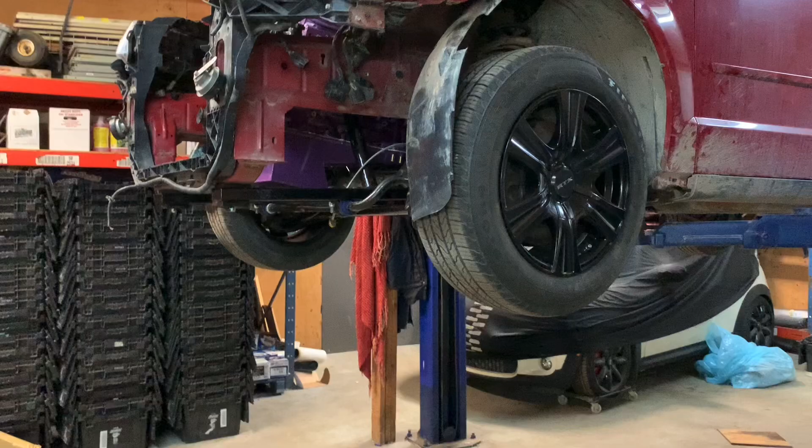I wasn't planning on working on the van tonight, but then a buddy of mine, Jonathan Wiseman, who's doing an insane K-swap turbo all-wheel drive Civic, which is insane, I'll say it twice. Anyway, he asked me about wastegates. He bought the exact same wastegate I did, which is like an eBay knockoff Tial wastegate. And he had some questions on how to plumb it, how to get it to work correctly, and I figured why not do a video on it for him. So here we go. So I'm going to set everything up on the bench with the turbo, the wastegate, some tubing and stuff, and we'll get started on this video.

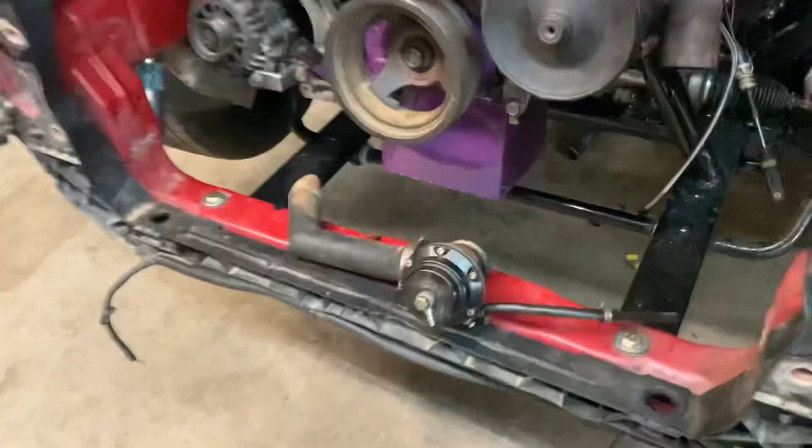I guess the first thing to talk about when you're trying to figure out how to plumb a wastegate is to know how the wastegate works. Here's our wastegate with the dump tube already on it because it was on the rat rod. This one's going to be situated kind of like this. So our exhaust comes up into the turbo, spins the turbo, all that fun stuff. But when we get up to our max boost, we want to evacuate some of the exhaust pressure so it doesn't overboost the turbo. That's where the wastegate comes in.

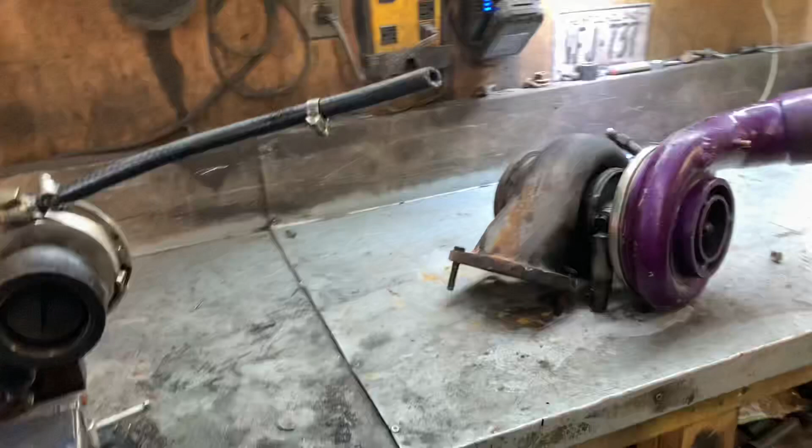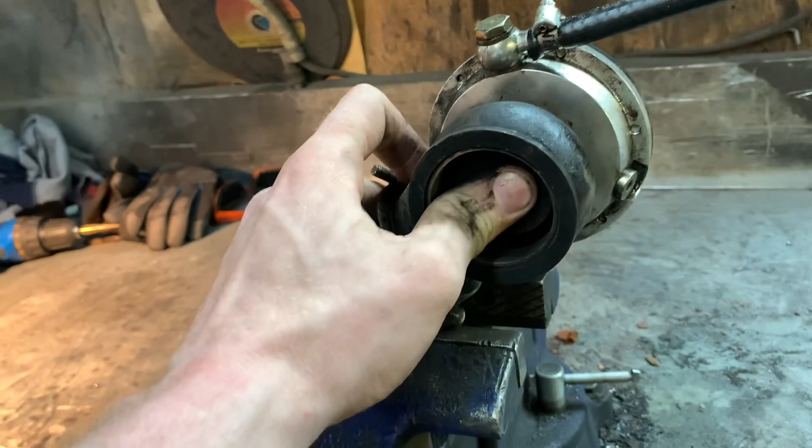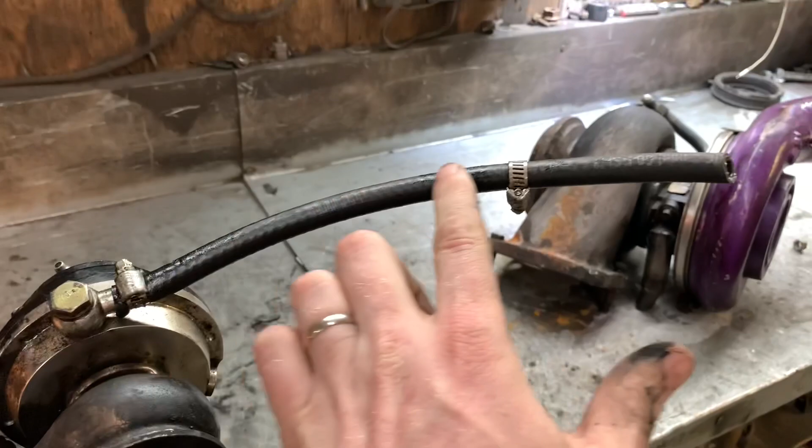When the turbo has enough exhaust going through it to make your peak boost, it needs to evacuate some of the exhaust. And it does so by moving this plunger that we can see here back. That way the exhaust can go out through the wastegate, out through the dump tube, and away. So how that works is there's a plunger right here that stops exhaust flow so you can build boost. When it's ready, it'll open. And it does that using a spring inside to keep the plunger closed, along with a diaphragm that gets pushed open by boost. And I'll take this one apart to show you.

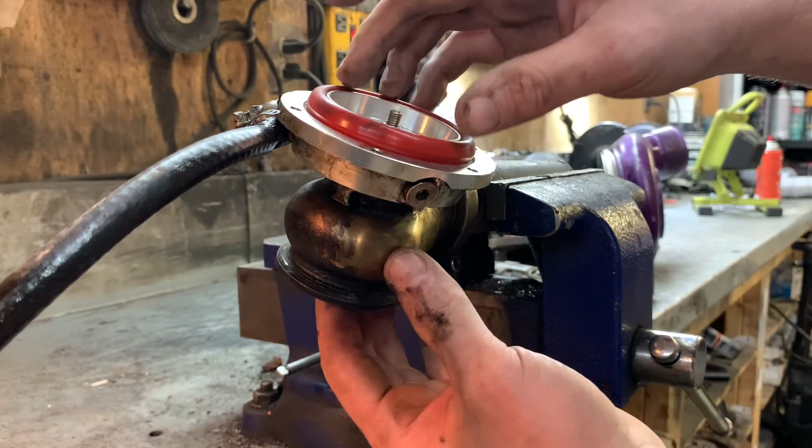And here's how it looks with it taken apart. So we can see our spring right here. Here's the cap with the top vacuum port on it. The diaphragm, this red piece around here, and the cup that the spring sits in that the plunger is connected to. With the spring out, it's easy to see that the plunger is allowed to travel up and down, or open and closed. Move it up here so it's easier to see.

You can see here that the plunger is fully open, exhaust is allowed to evacuate out through this pipe and calm down the boost. It'll maintain boost this way, because when you get your initial surge of boost, it'll open and it could potentially drop a little bit of boost, and then it'll sort of float in around where it needs to be to allow exhaust out.

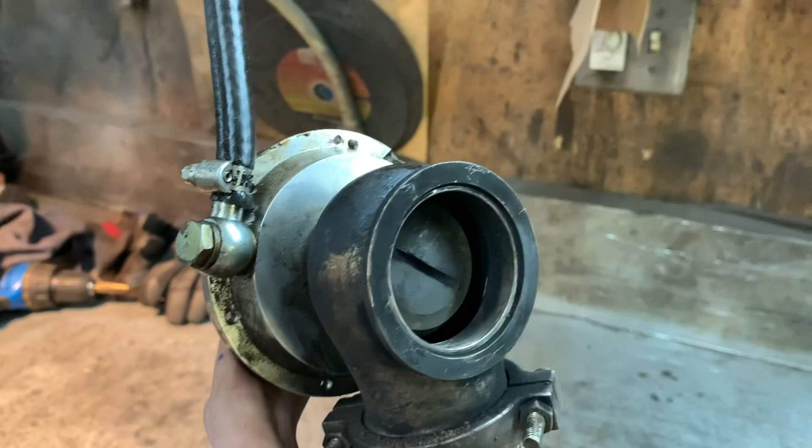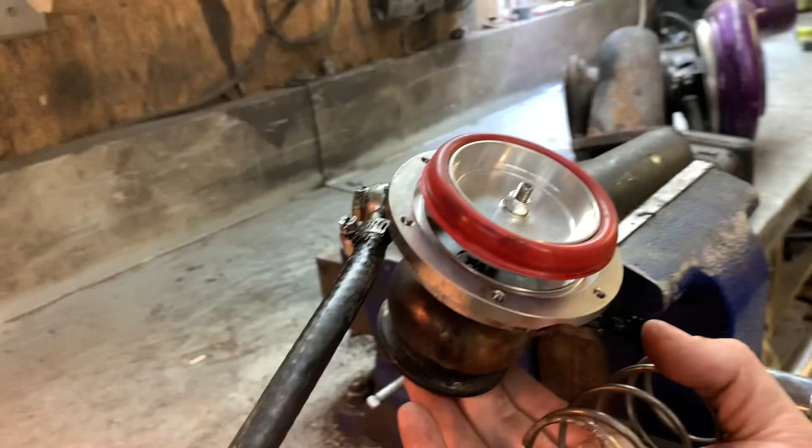But the spring sits directly on top of the plunger and stops the plunger from opening with no pressure. If you didn't have this spring in here at all, the exhaust would just push the gate open, you wouldn't make any boost. So the spring wants to keep it closed like this. They're quite tough to compress. This one is a 5 PSI spring. I ordered a 10, but eBay, so I got a 5.

As the spring is pushing the plunger closed, boost is trying to push the plunger open. Without a boost reference line on it from the turbo, it's not going to open when you want it to. A 5 PSI spring, I had them open at like 20 PSI and then spike, and then the boost freaked out. It didn't work. So that's why you need a reference line.

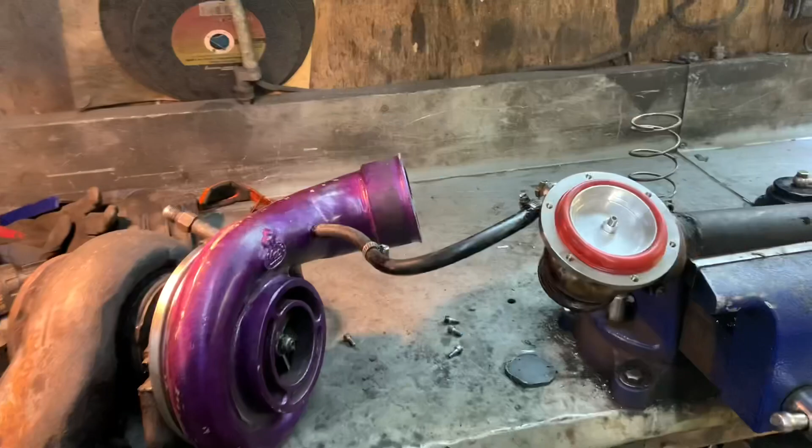The boost reference hose that's on the bottom of the wastegate is connected directly to the turbo in my application. So that when the turbo is producing boost, it'll also produce boost or pressure on the bottom of the diaphragm, which wants to push the diaphragm up. So with it being a 5 PSI spring, when 5 PSI of boost reaches this, it'll overcome the spring pressure, push the plunger open, and it'll maintain 5 PSI. Heavier spring requires more boost. A 10 PSI spring would make 10 PSI of boost.

Now before I get into boost controllers and the way of doing it correctly to make more boost out of a smaller spring: a 5 PSI spring will make max 5 PSI, unless your wastegate is too small, then you get boost creep, whatever. But it does as it's designed to. And me wanting 10 pounds of boost and having a 5 pound spring, I was like, I gotta fix

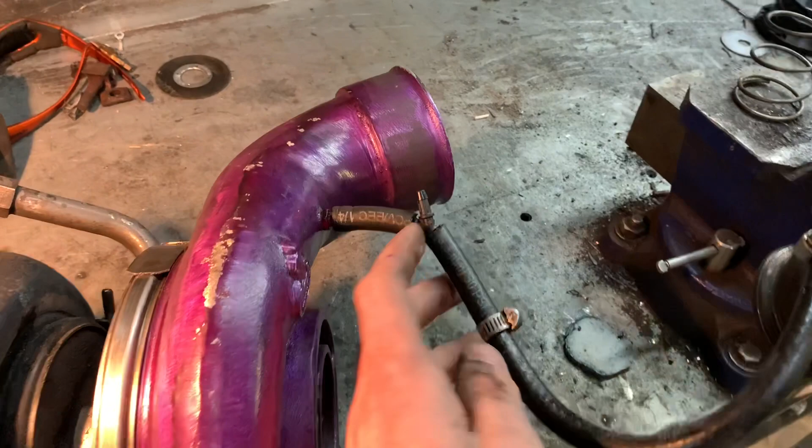this. Let's trick it. So I created a boost leak before the wastegate, meaning right here seeing 5 PSI, up here seeing 5 PSI, I gotta leak some boost off. So this little Y connector, which is just a generic gas line Y connector, goes in line. And as the boost is increasing, 5, 6, 7, 8 pounds over here, a lot of that boost over here is leaking out. So you might have 5, 6, 7 pounds right here, but as it's leaking off, you might only see 3 right here.

So if you get where I'm coming from, with the 5 PSI spring, I was making, I think it was like 12 or 13 pounds. And when it got to the max boost that it could create, and the wastegate saw its 5 PSI, it opened, and I maintained 12, 13 PSI. Now, I also drilled a couple of holes in this too, a couple 1/8-inch holes, and I made 15 pounds.

Now, this is a real sketchy way of doing it. I'm not going to say don't do it, because it worked fine for me. I didn't blow up anything until I got too spicy with the timing. But this is the backyard way of doing it, working with what you got kind of thing. So that's just a little trick for anybody who wants to fool their wastegate. With a 10-pound wastegate spring, you could probably get 20 or even 25 pounds. That worked really, really well.

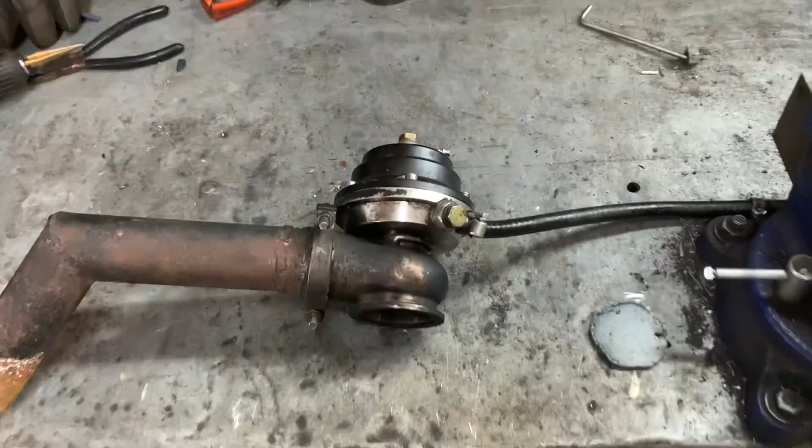When going only gate, or just with a boost reference here, leave this top port open because it needs to vent to atmosphere. Because as the plunger is opening, the top of this diaphragm, if it's sealed off, won't open. There's going to be positive pressure in here, and you'll need a whole lot of pressure to push this diaphragm up because this is all sealed. So you need it to push air out when the diaphragm goes up, and suck air back in when the diaphragm goes back down. So if you plug it, it's not going to move.

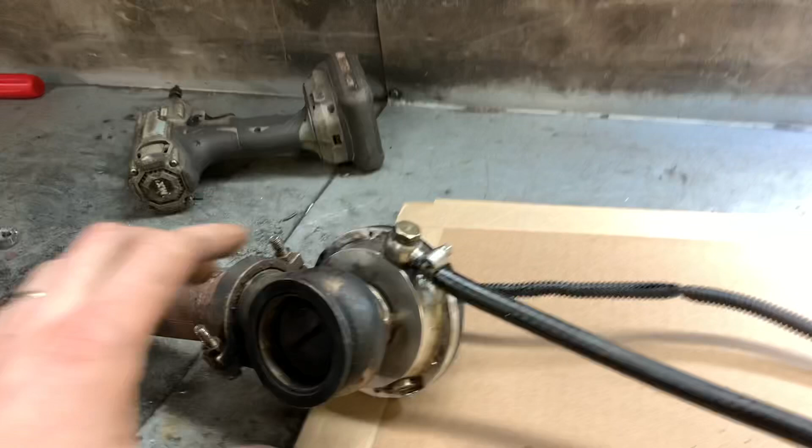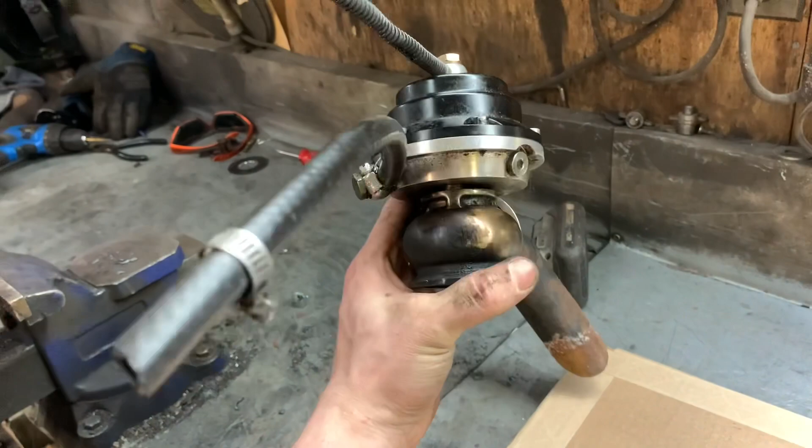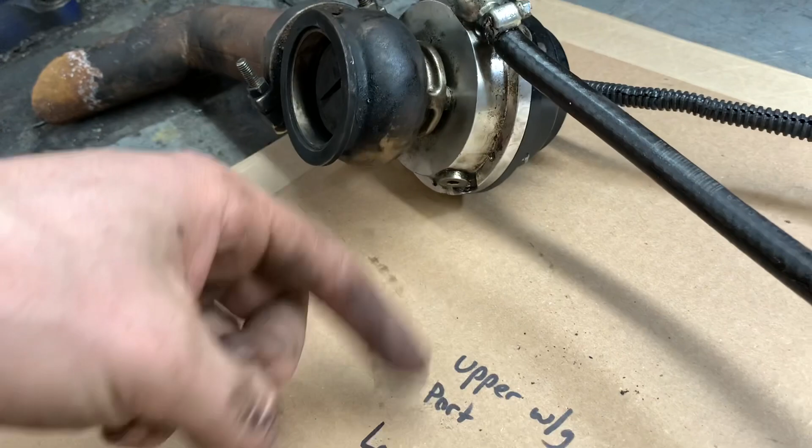Also, I should look at, because I'm just doing this as I'm going, there are multiple ports on the bottom of the wastegate. What I found is that basically they're for ease of use. If I've got something in the way over here, I can't use this port, so I'll use that one, because there's 2. But you always have one blocked off, or if yours has 2 or 3, only have the one that you're using hooked up. Have the rest plugged like this. Because if you've got boost coming in here wanting to push this gate open, and this is open, it's just going to blow it all out of here, and you're going to make some serious amount of boost.

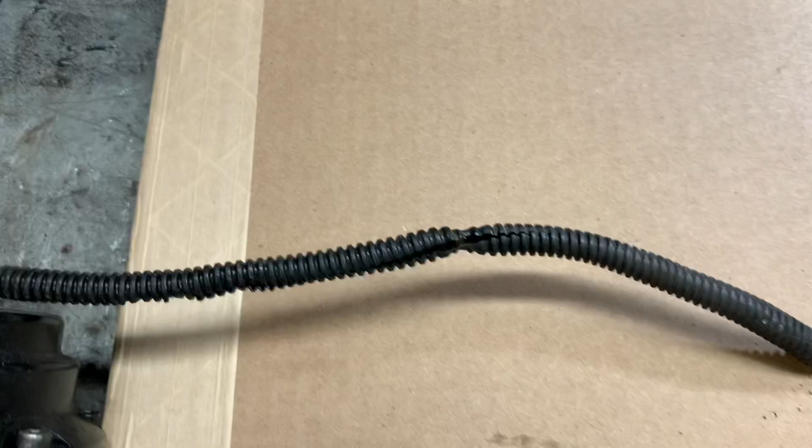So let's get into 4-port boost controllers. I'm going to draw up a diagram. Forgive me, this looks kind of crude. But here we go. This would be the MAC valve, or the 4-port boost controller. Here's the wastegate, lower port, upper port. This is not airtight, it's just conduit. And here's the boost reference hose to the turbo.

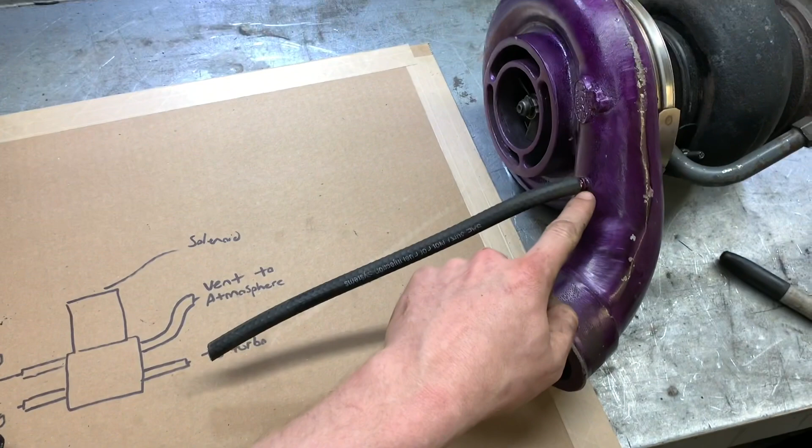So what we have here is the 4 ports. To the turbo, pretty straightforward, up to the reference pipe. It's always good to have your reference pipe directly off of the compressor wheel. That's where you get your most accurate boost reading. You can have it out here further, but people say pressure drop, all that stuff. Apparently this is about where it's best.

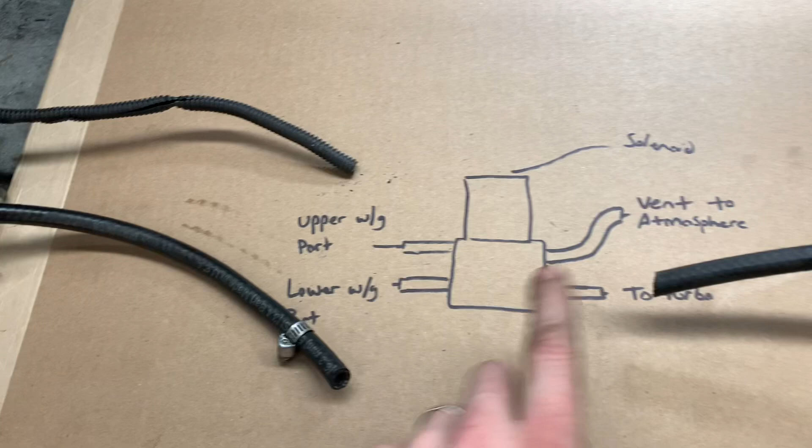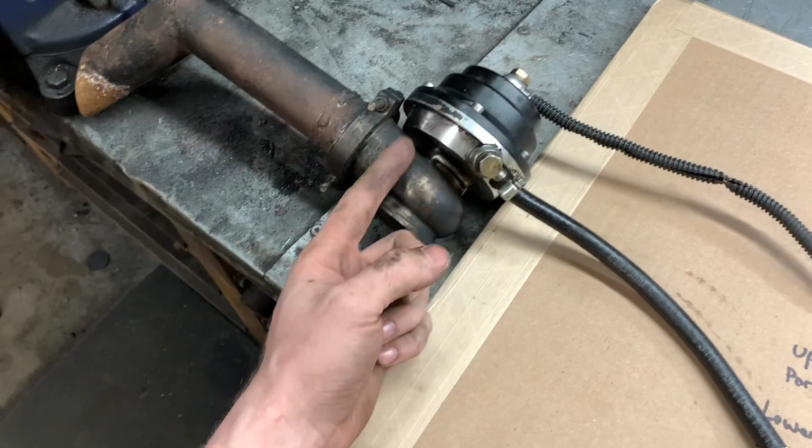Your lower port here comes into the wastegate, so you can see in a straight line that the boost goes directly across the solenoid into the lower port of the wastegate. This is what we were saying about boost pushing that plunger open. The spring is in there, of course, resisting forces.

So say if you have a 10 PSI spring, just for a nice round number, that, with everything disconnected, will make 10 PSI. Now here's where we get to our upper wastegate ports. What I was saying before about having pressure up here, if you plug this off, it can't open. So it'll make more boost. So this takes advantage of it in small increments.

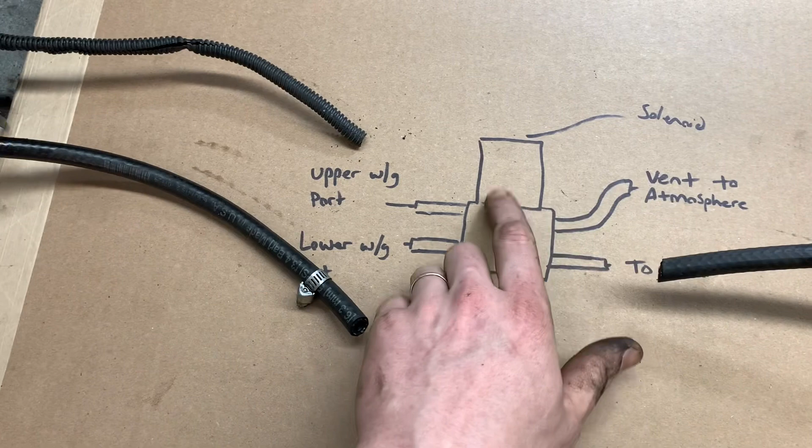So there's a solenoid here that will partially close off the upper wastegate port. You can see here that the wastegate port goes directly across and vents to atmosphere. If you make no changes, you're going to make spring pressure because, of course, you have boost coming in, pushing the valve open, opposing spring force, venting out to atmosphere. So everything is just normal as it is.

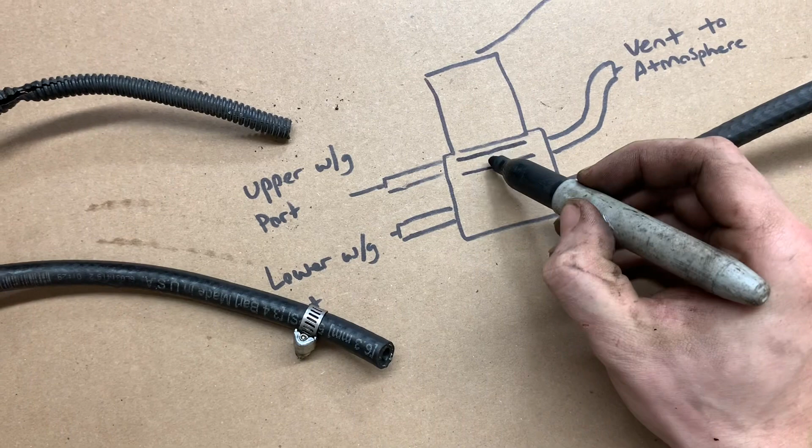When the solenoid starts to close off, and I'll draw it just to make it simple, let's just treat it as a butterfly valve like that. As the solenoid starts to close this hose off, it produces a restriction so that it builds up pressure on the back side of this hose and resists some of the boost coming out of here. So as you resist it, it wants to hold this plunger closed.

So you can do it in increments of, say, 1 PSI. So you close it a little bit, it'll make 1 more PSI because it's going to close that gate. It's only going to let so much air out. More boost. I don't think they close completely off because then I don't think it would actually ever open. But that's basically how it goes.

Now, this one here goes out to your solenoid wire or your trigger, which would be controlled normally by the PCM or like a dial or a switch, or there's piles of different kinds. And you set your intended pressure based on, I think, your spring pressure. So you set, go beep, beep, beep, up to 15 PSI, and it'll do its own magic, closing off the little orifices, and it'll make 15 PSI.

That's the nice thing about boost controllers, is you can control the boost. It says it in the name. It's awesome. It's not a 5 PSI spring where you're going to make 5 pounds. You can manipulate it a little bit and get 8, 9, 10 pounds out of it. Now, you are limited by your spring. You can't make 100 PSI off of a 5-pound spring.

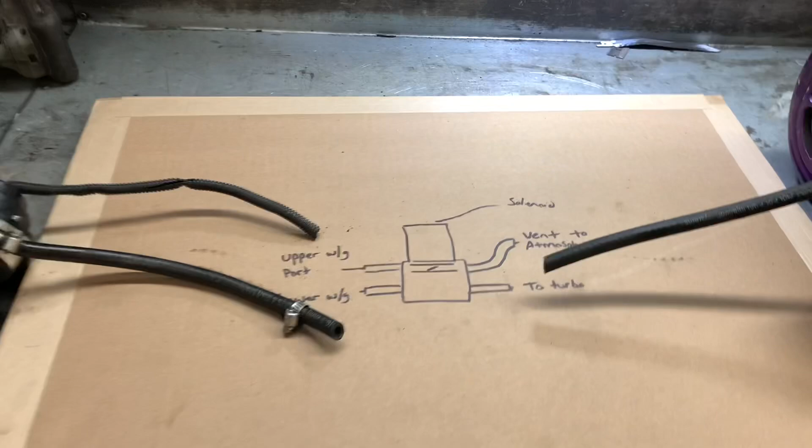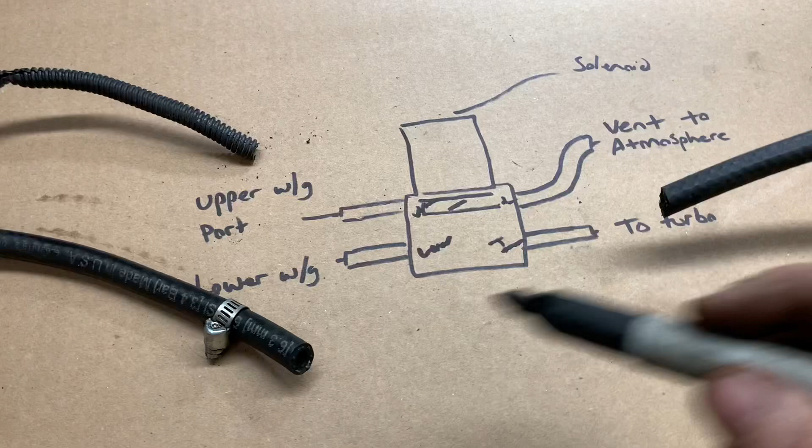You can see a good overtop view here of how this works. Now, there are lots of different designs, but they are going to be labeled. Like, they might say lower port and upper here, and maybe turbo or boost or something like that, and then atmosphere. Or maybe it just has arrows. But that's one of the designs there.